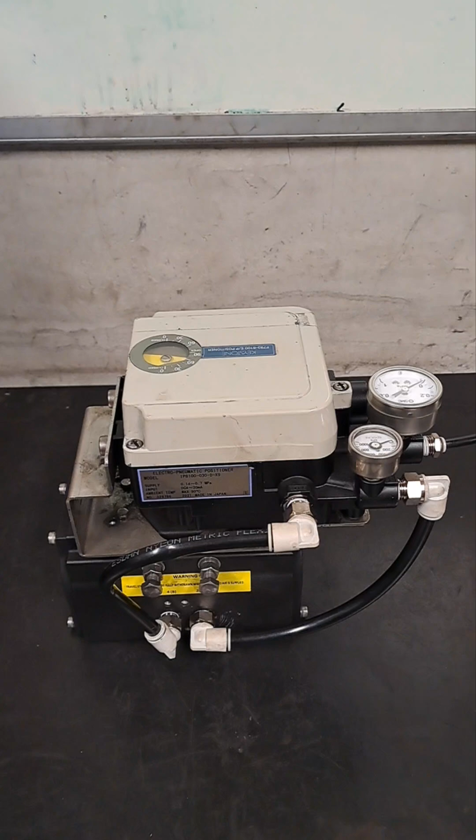Hey everyone, I'm just doing this video, just a quick little one to show the basic setup of a positioner. I'm hoping to make a few more videos to show you how to do a bit of fault finding on positioners, especially since there's a little thing inside there called a pilot valve, and we have trouble with that sometimes. That could save you a lot of money if you know how to change that out, why you change it out, rather than changing out the whole positioner body.

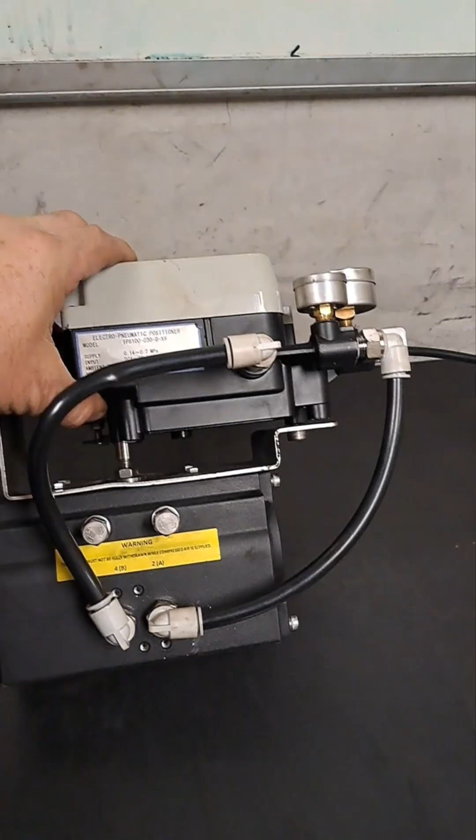So we're just going to go through some of the parts. What I've got here is just a test setup pretty much that I've put together. I use this to test overhauled pilot valves or pilot relays. As you can see, it's got the positioner on top, the actuator, but it doesn't have a valve at the bottom. I've left that open because I don't need the valve on there for testing. All I need to do is get the actuator to move and get some feedback from there back into the positioner.

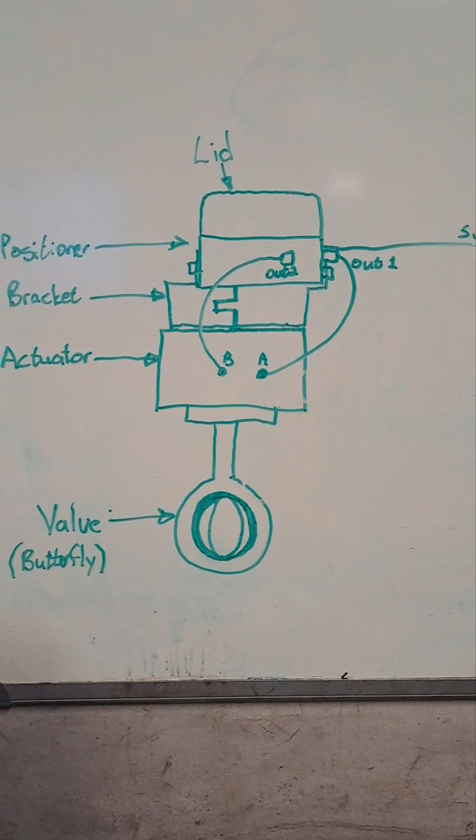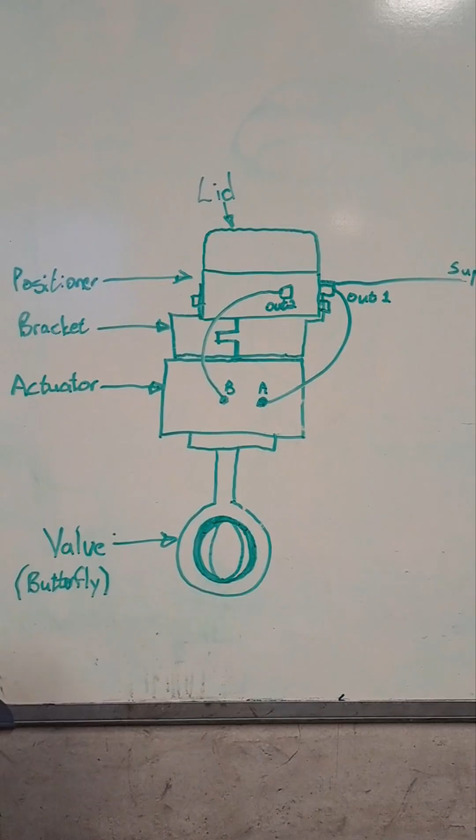So pretty much that's normally what a traditional setup in the field would look like, with a valve at the bottom. It could be a butterfly valve like this one, could be a ball valve. Once you start getting into gates that you need to open, you don't use one of these type of actuators. You will use a ram, as some people might call it, and then you have a very long feedback arm attached to that, and there's a bit of calculation involved to see how long that arm needs to be and where you need to mount that.

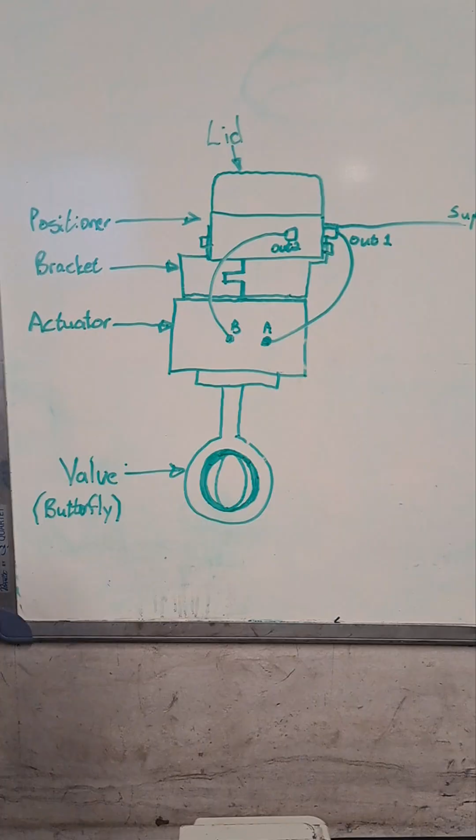I'm not sure if we're going to get to that in any later videos. We'll see. I'm not going to cover much of that right now. We're just going to go through this little setup here. So I'm also going to open the lid so we can have a look inside and have a quick talk about what's going on here.

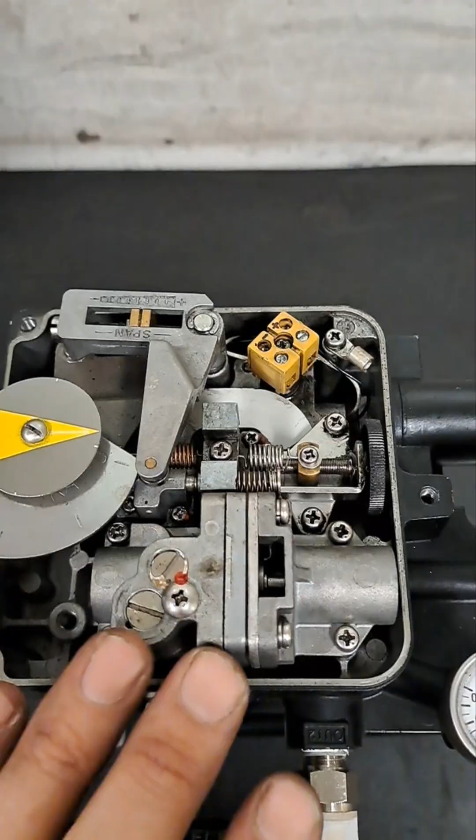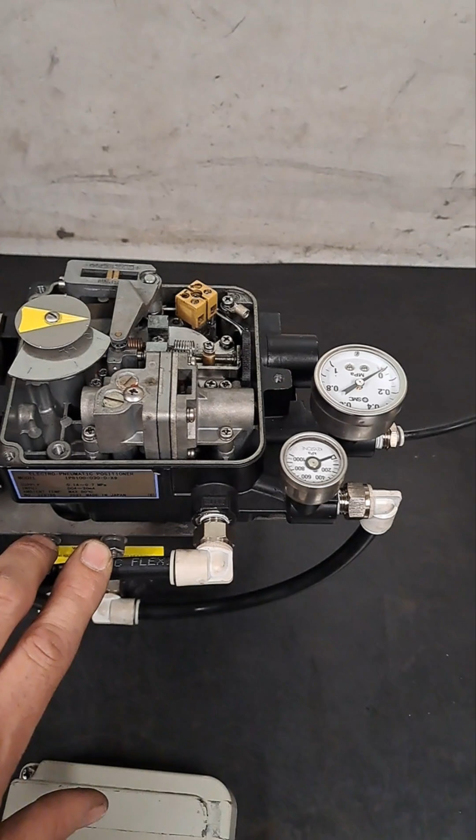Right, so I've taken this lid off, and you can see on the inside here, this is the pilot valve that I've been talking about. Can't say for sure, but I believe it's called a pilot valve because this is what actually steers this bit of machinery. It decides to put air out, output 1 or 2, as we can see here. That goes to the actuator to tell it to turn clockwise or counterclockwise. So that's pretty much the little unit that decides where the air goes and how much of it goes there.

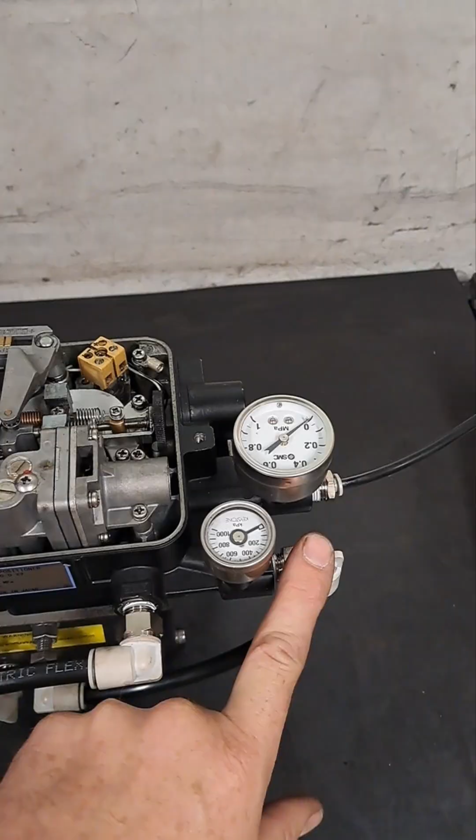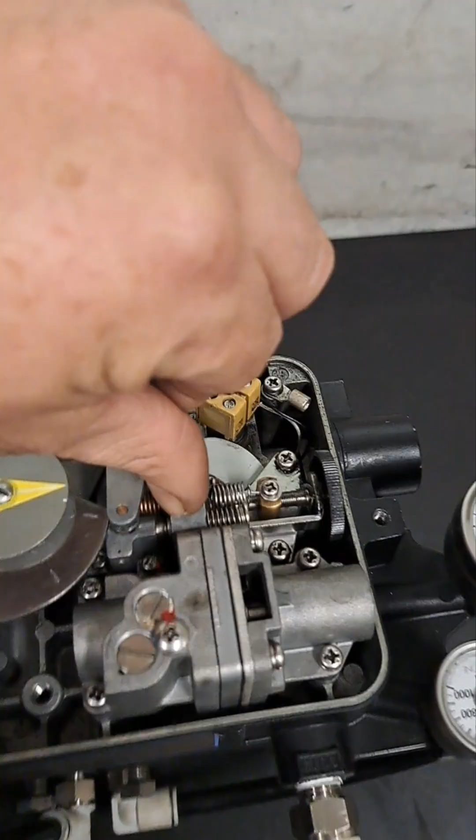So from that little pilot valve, there's obviously a few springs involved. This spring is loose. When you change this pilot valve out, you've got to be careful you don't lose this little spring. I'll show you how to manually actuate this positioner, even in the field. It's important for fault finding to know that you can do this, by toggling this little arm here, which doesn't really move much. I'll see if I can get a bit closer. That's the extent of the movement. That gives you full movement in one direction and then full movement in the other direction with the springs. That's not much,

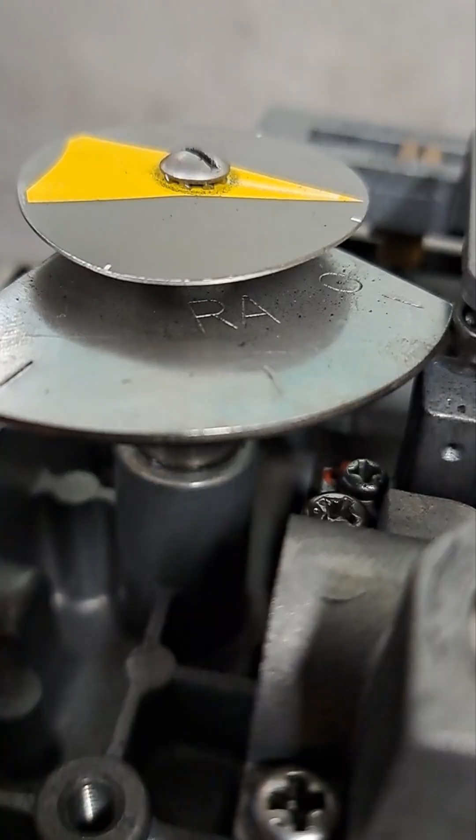but it does work. There's a little cam here, as you can see it reading RA on the top of the plate. That means reverse acting. The other side of the plate, if you flip it over, is direct acting. As you can see, this cam is not a perfect circle. It's longer here and shorter there, but if you turn it around, the 0 will be here, 100% will be over there, and she works a little bit differently, which I'll probably also cover in future videos if there's a need for it. So yeah, what else do we have in here?

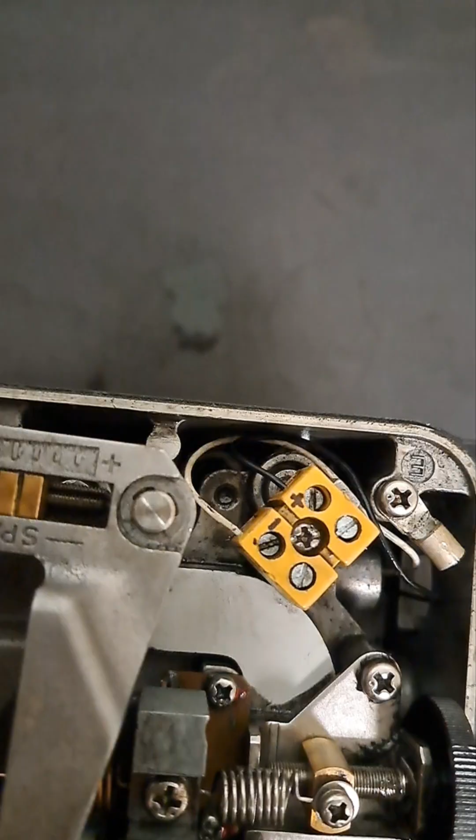Down the bottom here, there's a big strong magnet and a coil. From that coil come two wires. They're set up onto this terminal block. Let's see if I can get a bit closer. Now it might look wrong because there's a black wire in the positive and a white wire in the negative. For some people, especially in Australia, that is the wrong way around. What that really is, is international standards, so just something to look out for.

If you get to a positioner after someone's had a go and they can't fix it, they might have seen that, thought it was the wrong way around and thought they fixed it, didn't fix the problem, and then left the wiring the way they thought it would be. So it's just something else to look out for.

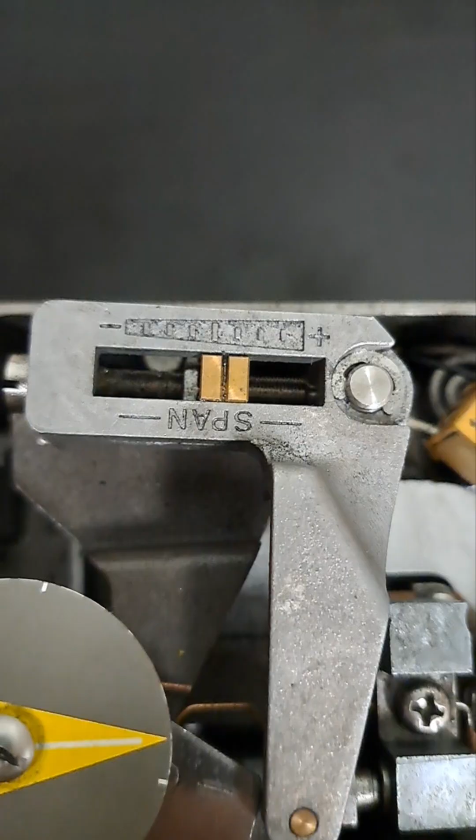Now there's two arms here, the one that says span on it, and there would be your span adjustment, because with these things we always need a span adjustment. And where it's sitting there is pretty much where it sits when you buy a new positioner, and they set up for actuators like this that pretty much give you a 90-degree range of motion. That's how they come standard. Obviously you might need to change it depending on what you are moving or actuating.

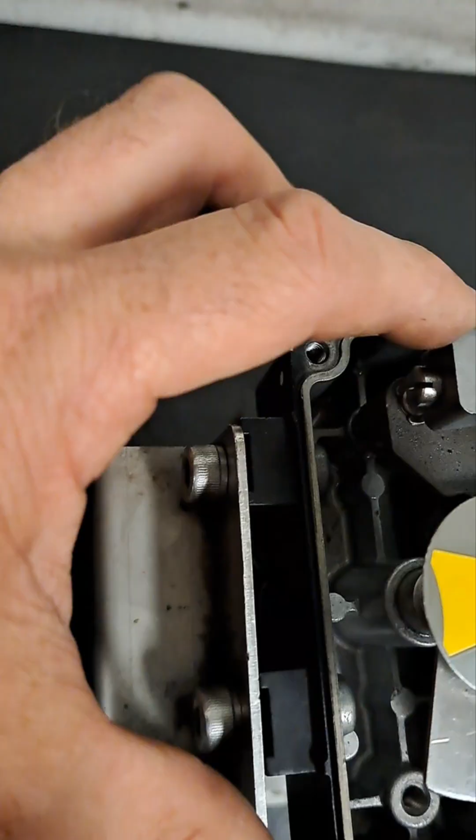Right, so there's another arm underneath there with a little wheel that runs at the back there, and as this feedback arm here moves, when the actuator moves, it's going to turn this cam that we see here that says reverse acting. Reverse acting is a standard setup.

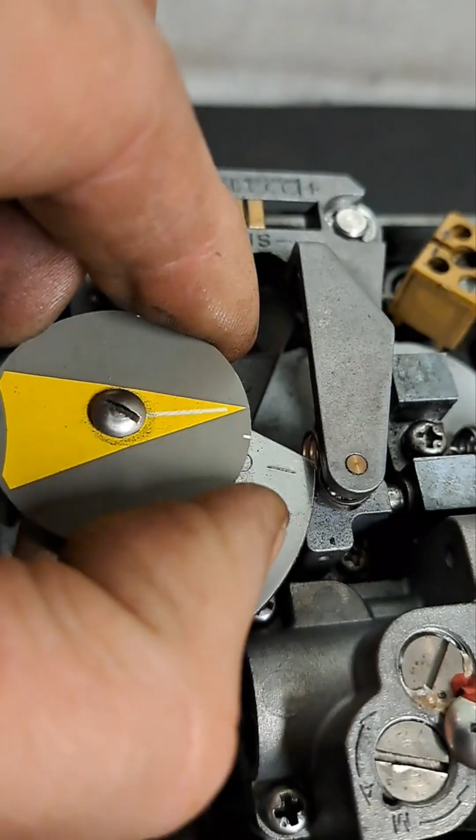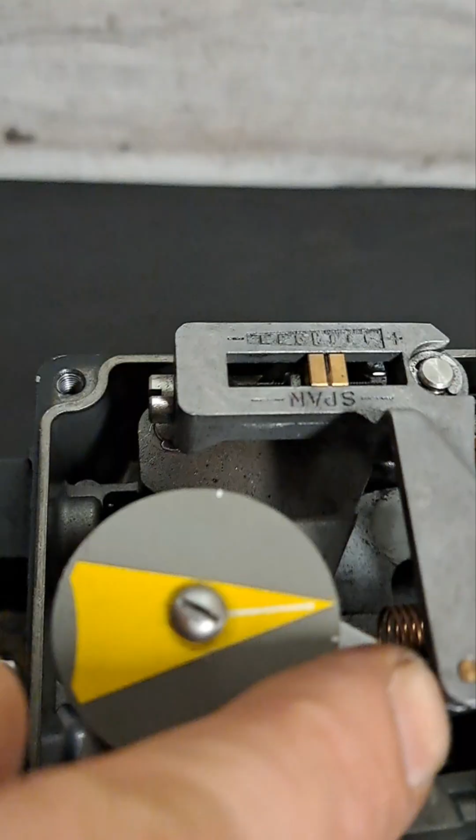So as that moves, it is going to lengthen this distance from the center to the end here, longer here, shorter there. So as this cam moves across counterclockwise to open, because she's shut at the moment, it's going to pull on this lever. I'm pushing it a lot, obviously, just so you can see it move. But yeah, so when that happens, it pulls on that bottom arm, which tensions up this spring, which is going to pull on this toggle over here, and a bit of a counter spring there.

And what happens pretty basically is your 4 to 20 milliamp signal goes to this coil, which would move this arm into a specific point. That translates through to this pilot valve. It decides where to put air. It's going to move the actuator. That feedback arm is going to pull this cam across. It's going to pull this counter lever back, and it's going to pull that coppery looking spring there back up to a point where this finds an equilibrium, so that the pilot valve stops sending more air one way rather than the other.

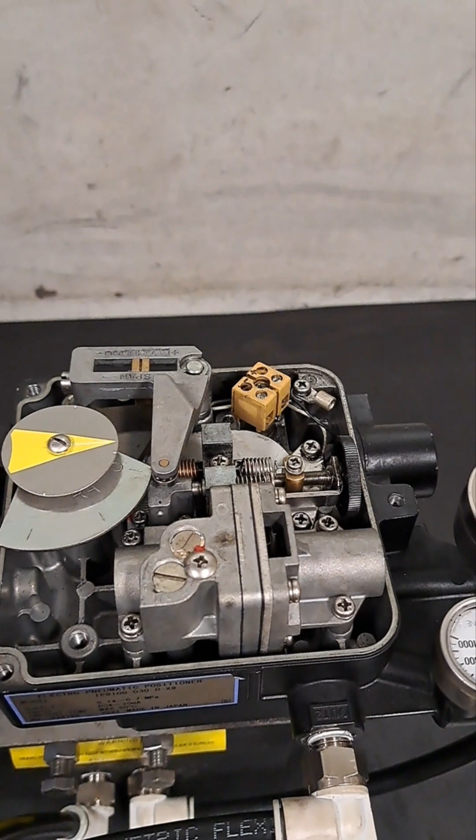So as it gets closer to its position, this arm would move closer and closer into the right position. The mechanical feedback balances against the 4 to 20 signal through this little toggle arm, and when that reaches an equilibrium, that's when the pilot valve stops sending air to the actuator, and it sits where you want it to sit, whether it be 25%, 50%, 75, 100, or any other number you can think of. So that's pretty much just the basic operation of that.

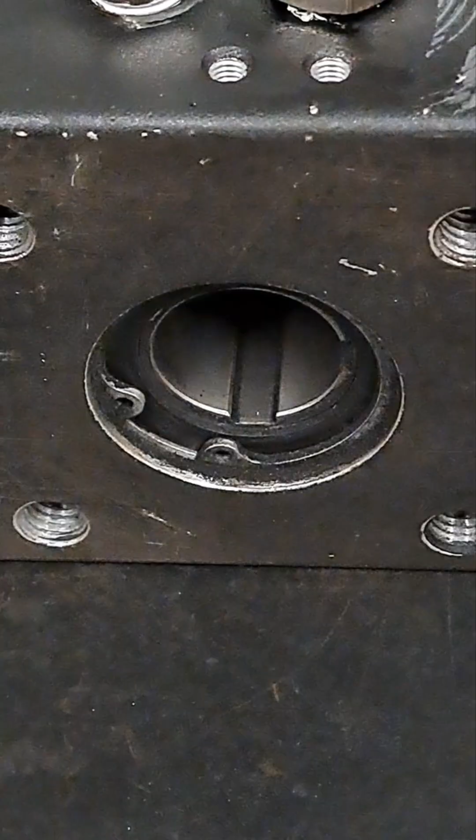Obviously, I don't have a valve on here, I don't have it hooked up, but as you can imagine, with the valve in there, that hollow shaft is going to turn the shaft on the valve and make the butterfly valve open, or whatever other valve you have. So yeah, that's pretty much the basic setup and parts of this.

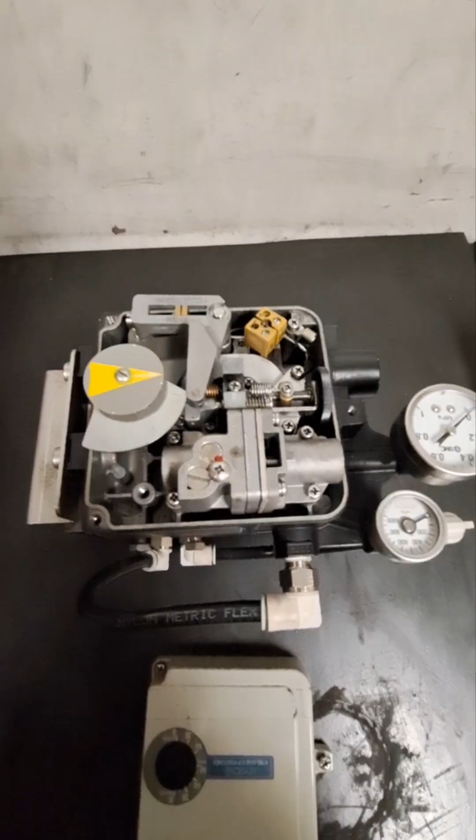Now, I'm not an absolute expert on these things. All I'm trying to do is share the information that I have, that I've built up over a few years by playing with these things myself, doing a bit of research and listening to other people. I've got some bad advice from some people. Some people didn't understand how things work. They just followed a process without understanding it, and it only gets you that far.